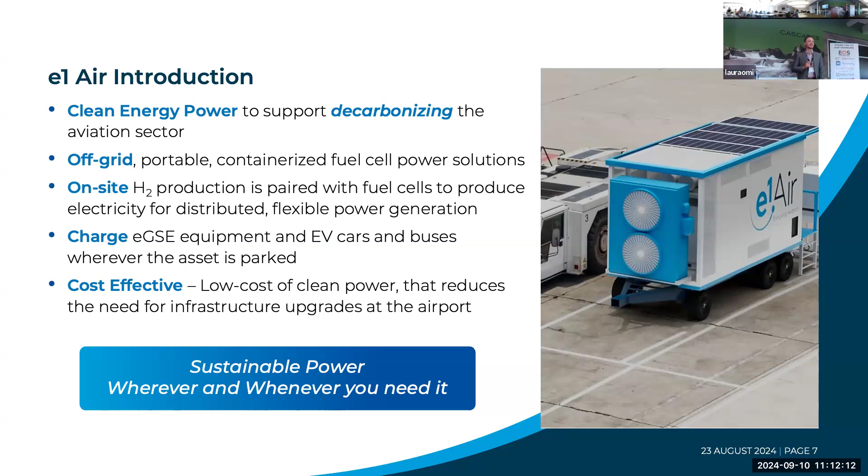Element One is the license holder or patent holder for the technology. They have a number of different licensees focused on different markets. So just like we're for aviation, there is E1 Marine focused on the marine sector, Kaizen for transportation, and so on. This is sort of where we fit in - Nexa and Element One, it's a 50-50 joint partnership for E1 Air.

So why do we need hydrogen, affordable hydrogen at airports, especially right now and in the future? That's sort of what we're going to be answering today.

Right now, there is a big problem with electrical capacity at a lot of the major commercial airports. You may think that's not really a big deal, they're not really charging anything, but they actually are. There's a lot of electrical ground support equipment today that are battery powered - think the tugs, the conveyor belts, the pushbacks. A lot of these airports use electrical ground support equipment, and those things need to be charged. As more of the fleet of ground support equipment is transferred over into battery powered, it's more and more taxing on the airport's power supply.

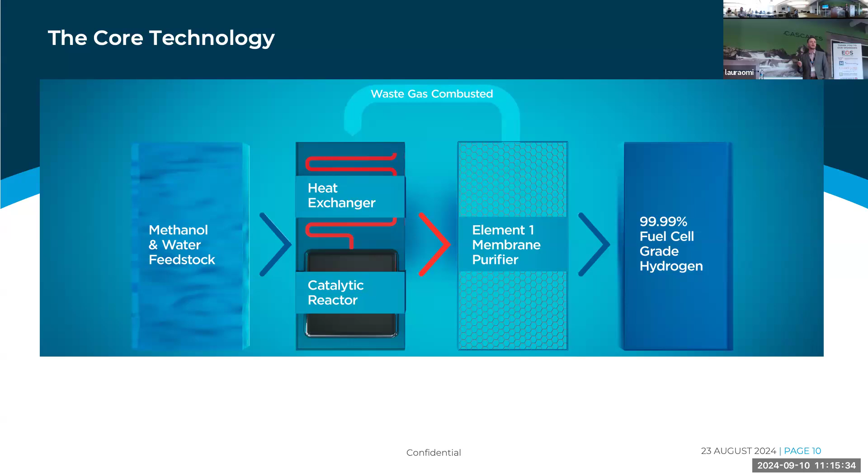So if you do have a portable battery solution for just the startup, you are technically an off-grid power solution as well. Once the hydrogen is produced, that hydrogen can be used directly as a fuel source that can be put into vehicles, or it can be put through a fuel cell to generate electricity.

This is the big reason why this solution makes sense. The biggest problem with hydrogen is the transportation of that hydrogen - it's very costly. What this solution offers is you are no longer required to move hydrogen at all. What you are moving is liquid methanol, which is a liquid at room temperature and room pressures. It's a very common chemical, most commonly used in windshield washer fluids, so it's something that is readily available. There's everything from gray methanol to blue methanol to green methanol, so there is even a completely green and clean solution for the feedstock.

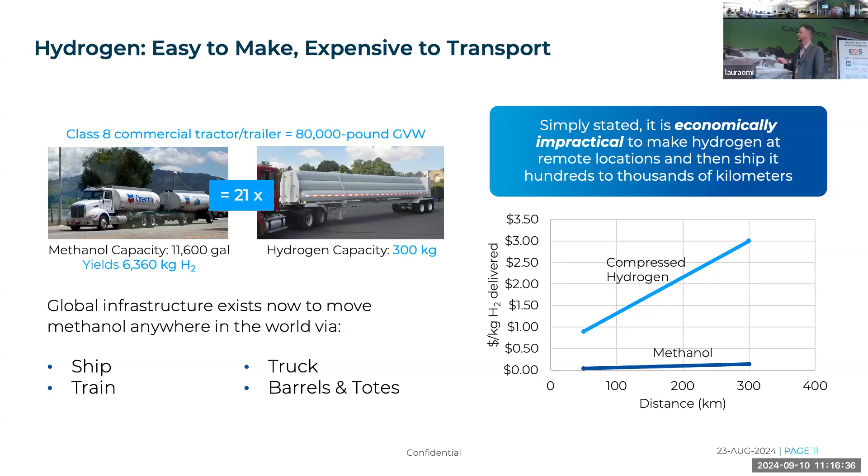So I'm going to get into the advanced air mobility side of things. We're going to go back to the E1 Air solution after I've identified what the markets are for this.

But then tomorrow's demand is going to be these future, not so distant future, eVTOL aircraft, which are electrical vertical takeoff and landing. Just a show of hands, is this room familiar with eVTOLs at all, advanced air mobility? Okay, 50-50. That's good. I'm going to go over a bit about what that is.

Advanced air mobility is just what I sort of explained. It's using these new electrical or hybrid or hydrogen powered aircraft to move people in and around and between cities, in the routes and markets that conventional aircraft are really not able to meet the demand for, for a number of reasons, whether it's helicopters or fixed wing commercial flight.

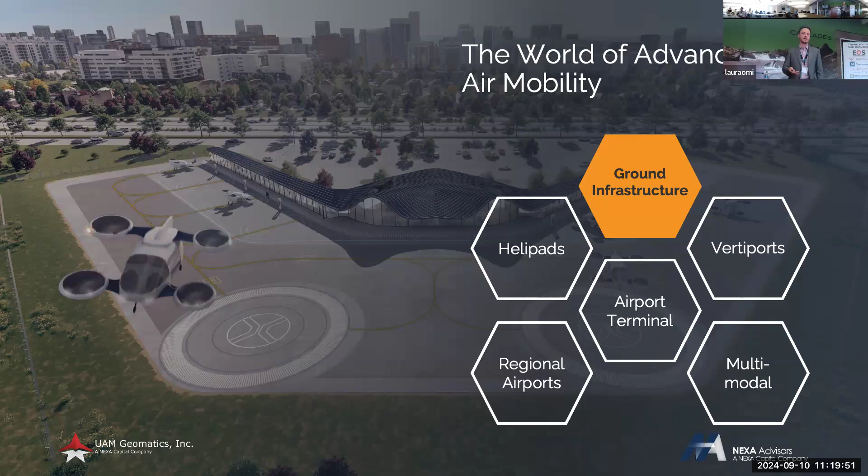And then the sort of second side of the infrastructure is the low altitude air traffic control. So the conventional way the FAA, for example, does things is not compatible with the altitudes, the volumes, the trip lengths of these eVTOLs. So the presiding opinion is that bespoke, smaller networks and ATCs are going to have to be stood up in order to oversee all of the operations.

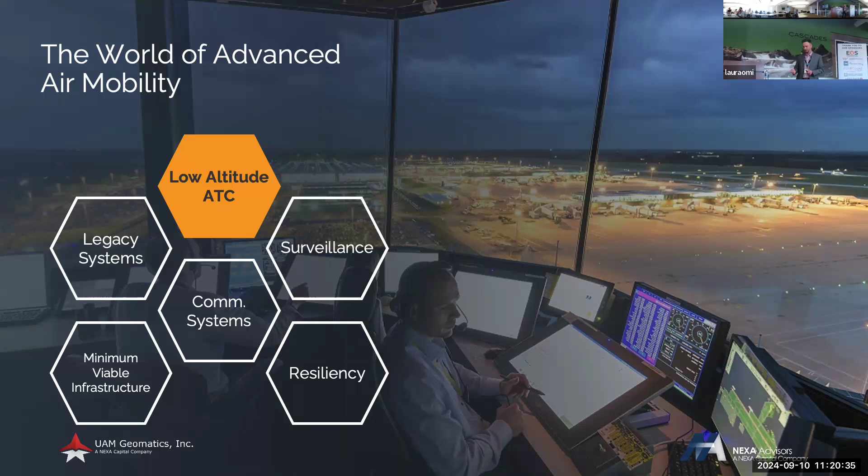So our subsidiary, UAM Geomatics, we provide a forecast for advanced air mobility. We've analyzed around 100 different metropolitan regions around the world. It's a global study. We have subscribers such as state governments, eVTOL manufacturers, helicopter operators—it's a pretty wide range. The GAO used our report to inform Congress back in 2022. They really looked deep into our numbers and our methodologies to try to understand if it makes sense, and they found that it did.

So to understand what the potential is for advanced air mobility, you have to sort of start with what's already there. It's an industry that could easily balloon in cost, and you want to reduce that cost, and you want to be smart about how you deploy the infrastructure. So that starts with an inventory of the existing infrastructure and networks that are in place today, which can also be utilized to understand the markets that should be the first adopters or first ones targeted by these eVTOL operators.

So our analysis looks deep into the price sensitivity of each one of these locations. We have a number of different use cases—emergency, airport shuttle, air taxi, regional campus, business aviation, and cargo. That set is continually expanding. And then what we do is a bottom-up analysis where we build out the infrastructure and identify what price sensitivity for each location is really the sweet spot for balancing infrastructure availability and demand. So it's based on ticket price.

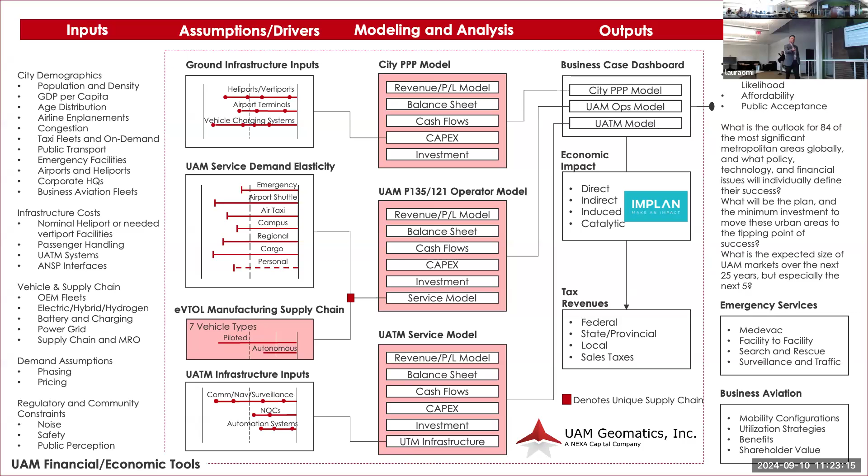And then for some of our projects, which I'll get into—the Virginia study that we did—we go one step further and do an actual economic impact analysis using IMPLAN. So we can identify job creation, tax revenue, all of those things that oftentimes state legislators are very interested in.

So when we talk about infrastructure and the cost that goes into these different pieces of infrastructure that we forecast, there's a lot that has to go into each one, whether it's a vertiport or a network operations center, a NOC, basically a remote tower capability. There are studies that have to be undertaken. There's the physical equipment that needs to be purchased and depreciated, as well as staffing and maintenance.

So utilizing everything that I just described, back in 2022 we conducted a statewide study for the state of Virginia with VIPC, who I think I saw some people here. This was a report that I strongly recommend you guys read. It's a Virginia-focused report. It looks at the entire state, and it looks at what the potential is for advanced air mobility in each one of the different regions that we looked at, going into all of those things I described.

And a point on the vertiports, just tying it back into E1 Air, we don't really know what configuration a lot of these aircraft are going to be. Some of them are purely battery. Some of them are purely thrust powered, so there's no forward lift capabilities, and there's not a lot of efficiency. You have to charge on both ends, basically. And so the charging requirements for some of these vehicles is very large, especially with the battery densities that we see today.

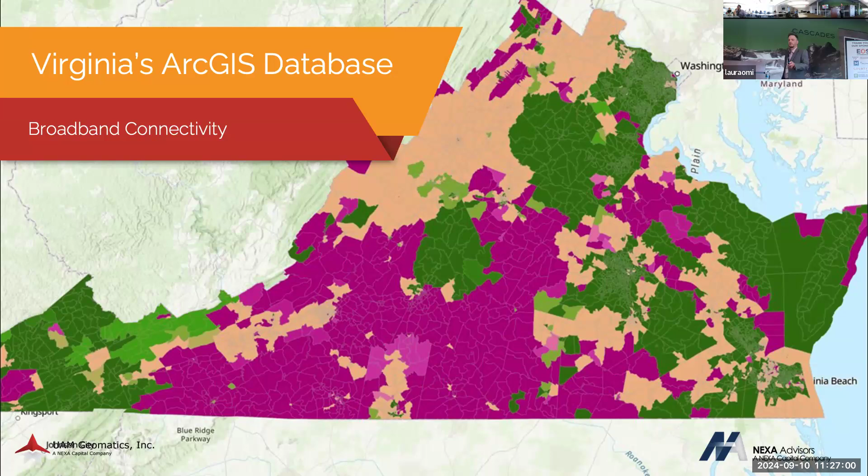So what we found is that Virginia is ripe for advanced air mobility. There's a lot of existing infrastructure that currently exists for advanced air mobility to be a good early adopter in this state. One of the most important factors was the inventory of regional airports in Virginia. Virginia has one of the best networks of regional airports. They're strategically located — I think back in the 40s and 50s when they built a lot of these out, the idea would be that something like advanced air mobility would be taking place just with conventional aircraft. So they decided to build out a lot of these airports with a good capture basin all over the state so that you could fly really anywhere you wanted.

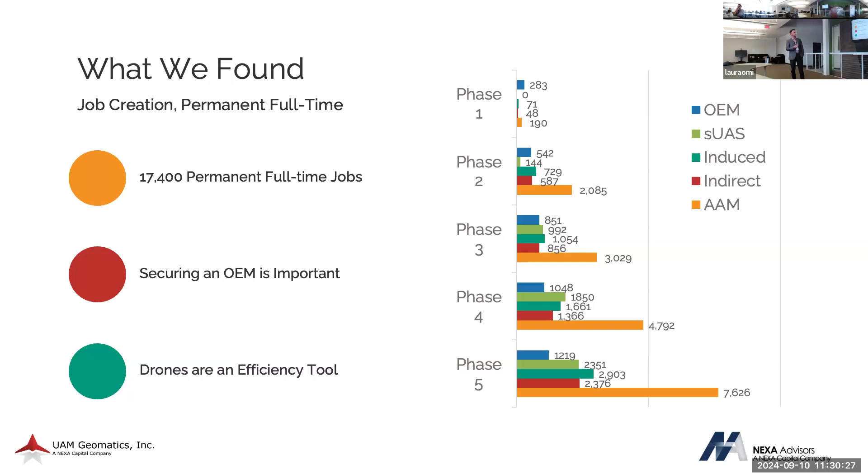And then tax revenue, but it's not much interest, I don't think, in this room. So for the GDP impact, the economic impact assessment, all the way up to $12.5 billion of GDP impact over the next 20 or so years. So it's a pretty substantial opportunity.

So then we've also looked at a number of different locations, states, cities in the United States, and the opportunity is very large. We're looking at a large opportunity here, which is the point going back to what is the market for hydrogen at airports? It's right here, and there's a number of aircraft that do use direct hydrogen on board, whether it's a hybrid electric or direct combustion of that hydrogen. There's a number of different variations that use both, but even with the electrical charging, the use case is there.

So E1Air, our technology can do both of those use cases. Like I said, it's containerized, it's mobile, it does power generation. So you're able to have a plug right there ready to go. A number of plugs. There's different sizes of these units, so there's a varying number of voltage and power generation capabilities within these.

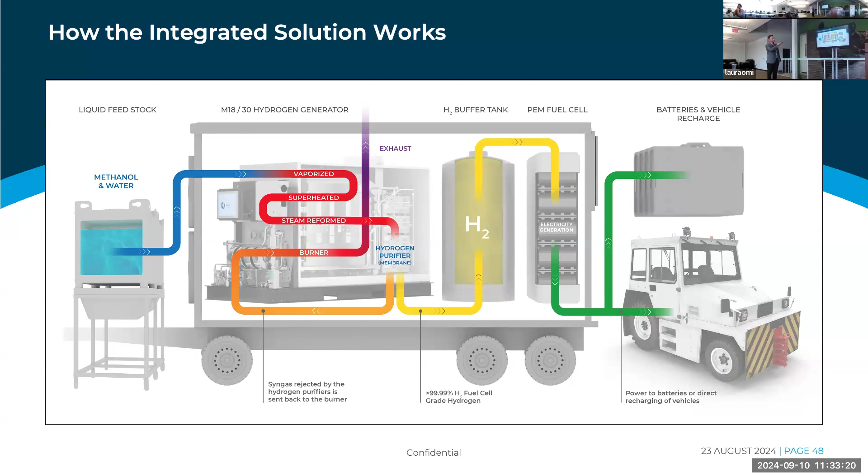So this is how it works, basically. We use a mixture of methanol and water that's pre-mixed. It goes into the reformer, it gets vaporized, and then purified through the membrane. The exhaust gets burned and then dropped out the top, but it's just water and air. And then you're left with hydrogen that, if you'd like, you can run it through the power cell, the fuel cell, to produce electricity, or you can just use the hydrogen as a fuel source.

So methanol is a very common chemical. It can be produced from a number of different feedstocks. Like I said, it goes all the way from gray up to green. They're all available today at varying costs. Green is more expensive, but gray is oftentimes almost worthless. It's sort of a byproduct in a lot of different manufacturing capabilities. So natural gas, for example, is a big producer of methanol. The process of producing the natural gas also, as a byproduct, produces methanol.

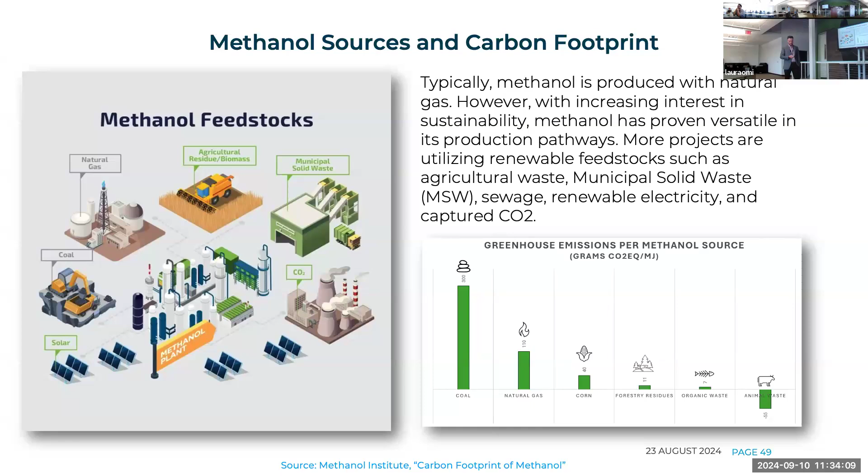Methanol is cheap, so you're able to use it as a feedstock today in its gray or blue state relatively affordably. So you're able to use hydrogen or get hydrogen for a decent cost versus going right now, if you're in California, I think you're paying $30 or so per kilogram at the pump if you have a Toyota Mirai. So our analysis shows that we can produce it for around $5 per kilogram. So it's a substantial savings. And that all comes from the transportation and storage of that hydrogen.

This is the forecast for green methanol through 2029. So right now it's relatively small. The demand for green methanol is not something that historically has really been interesting to the methanol industry. But as these new technologies come out and the hydrogen use case is pushed to the forefront, the investment dollars have been made into increasing the supply for green methanol. So if there are companies that are more interested in the green aspect rather than just the cost savings of the hydrogen, the solution lies in the next few years.

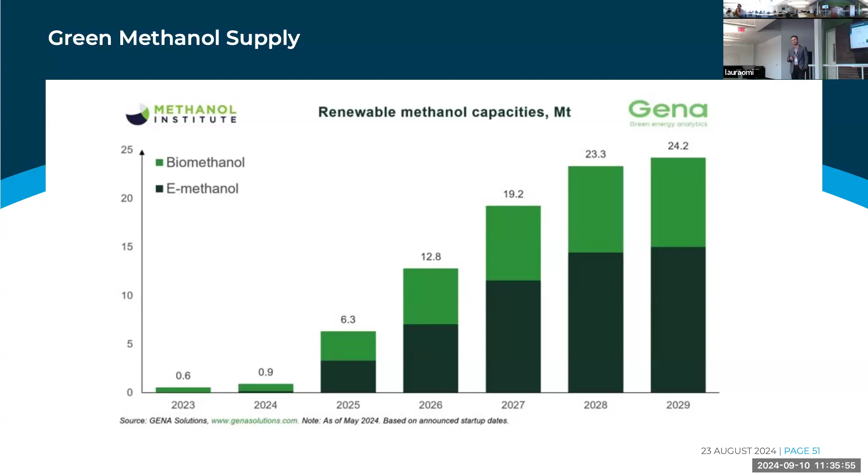So these are the different hydrogen options. We've got our solution in the first box. Then you've got your electrolyzer, which uses electricity and water. You're cracking the H2O molecule to produce hydrogen. It's a very energy intensive process, so there's a lot of problems that come with that, and your yield is rather low.

That solution is great if you have a windmill right next to you, because you can just use that energy to electrolyze and produce your hydrogen. But oftentimes you don't have that, so this is a solution that works separately.

Ammonia is a similar chemical to methanol in that there's hydrogen stored inside of it that you can extract. But ammonia is a more dangerous chemical. There's a lot of problems that come with it, and the efficiency yield is much smaller.

And then the last two are just compressed and liquid hydrogen themselves, which it all comes down to transportation and storage. Hydrogen is a very small molecule, so it wants to escape from everything it's held inside of. That means you have to really build your containers well, and the going idea right now is pipelines. You have to build them to a very high degree of efficiency so that the hydrogen molecules don't escape and it's safely transported.

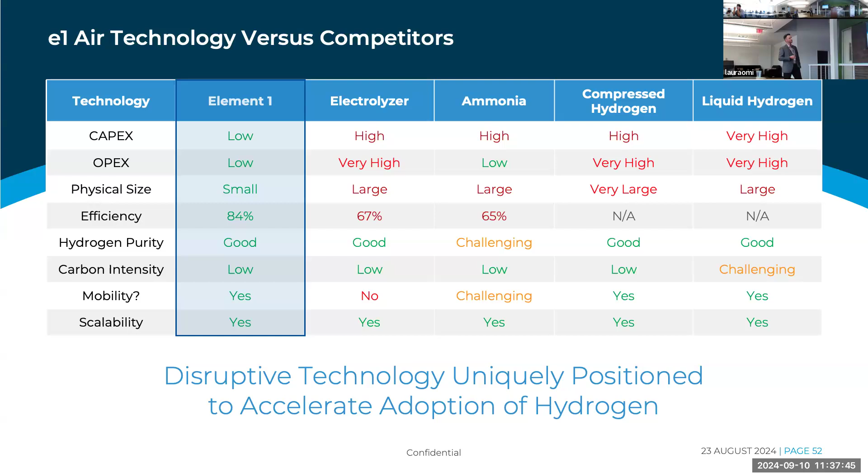And this is our CPG 150. There are some specs here. I'm not an engineer, so this material will be provided to you guys. But you can also go on our e1air.com website and read all the spec sheets of the different solutions and products.

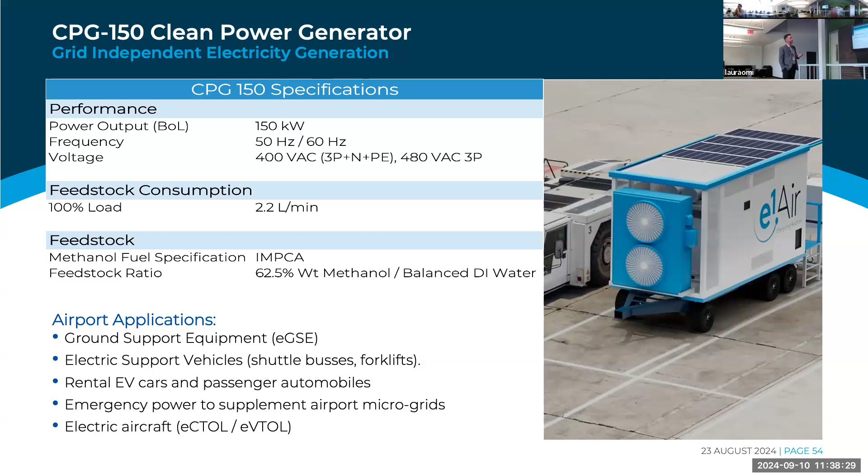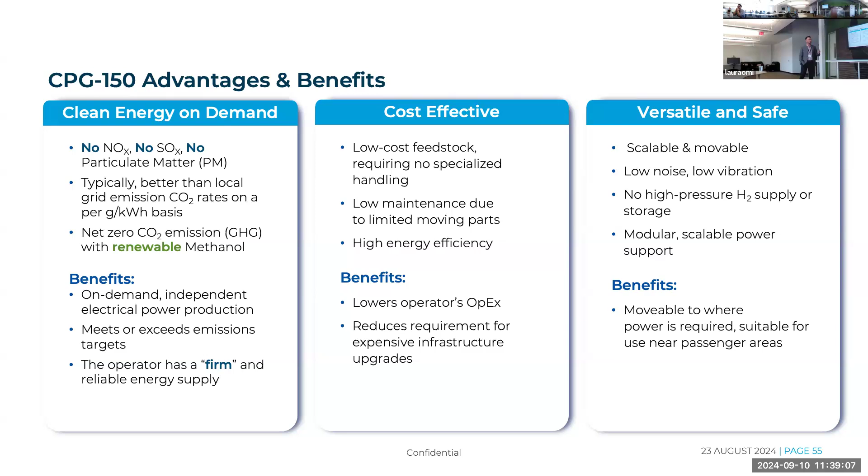This technology is clean, on-demand energy, cost-effective, especially when you're constrained by your electrical supply or your requirement for hydrogen itself, which today is very limited, and it's also portable. That's a big bonus for airports, since they don't necessarily want you setting up a permanent fixture on their tarmac. It's sort of a requirement that these things be able to be moved around.

So I've gone over a number of these, but just to hit these home: this is a proven technology, it's in use today. I guess I should have said that. A number of the different licensees have these generators deployed and functioning today, namely E1 Marine Space, as well as E1 themselves. They have a big unit that they run in their plant in Bend, Oregon.

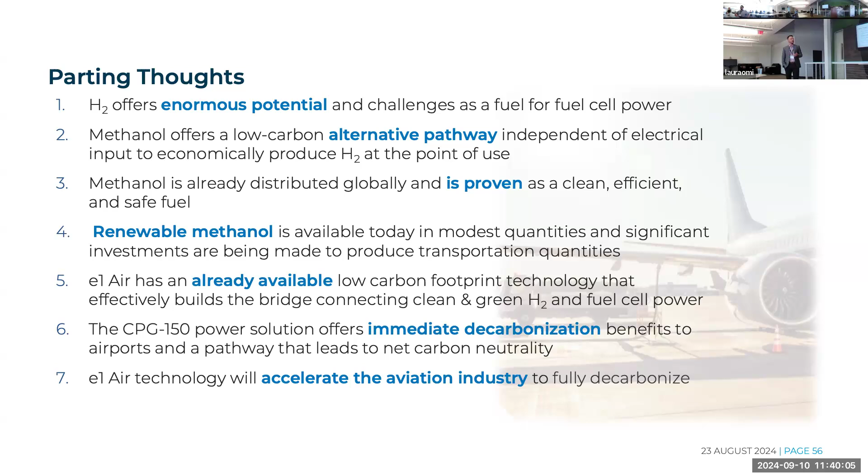And the methanol is everywhere. You can order it online, you can get it at Walmart. It's something that's relatively safe for people. Can't drink it, but it's available, and it's a solution that can be quickly implemented.

So that's it. That's our E1 Air technology, as well as the advanced air mobility piece. I hope you guys learned something, but I'll take any questions that you might have.

Can you speak a little bit to the business model for E1? Are you selling these units, are you leasing them? Yeah, so it's a subscription basis.

So we charge — let's say an airline wants to deploy these so they can charge their ground support equipment. Right now that's really our only market, so this is our only business model at the moment. But we would charge a monthly subscription, and that allows for a certain allocation of energy, electrical charge. And if you go over that, it's an extra charge per kilowatt hour.

So E1 would handle the logistics of the methanol at this point? Yes, exactly. It's basically a turnkey solution for these airlines.

Yeah, I guess kind of similar on that — do you find you have to implement additional safety measures, like fire eyes or other ways, since methanol burns clear? Same with hydrogen, right? Yeah, you have an issue of seeing when there's a problem, so you have to go to great lengths there, either on the systems themselves or in that perimeter. So I guess part of that CapEx would be upgrades there.